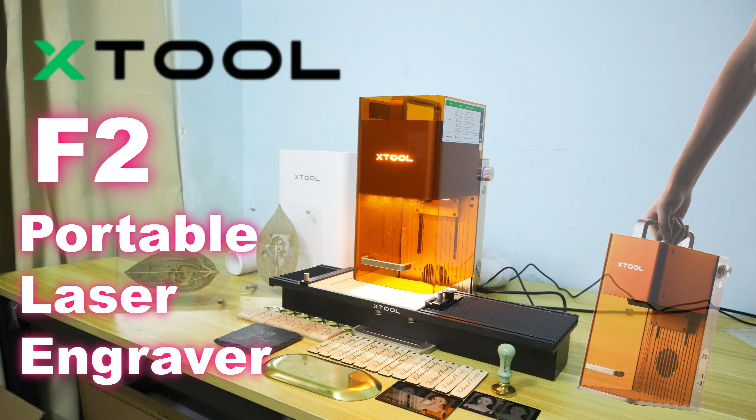Today I will introduce you to the xTool F2 portable laser engraver. You may remember the xTool F1 which they launched 3 years ago. The xTool F2 has been upgraded in many ways while maintaining the same dimensions as the xTool F1 product.

For example, the xTool F2 features a more powerful dual laser system: a 15 watts diode laser and a 5 watts IR laser, making it more powerful and efficient.

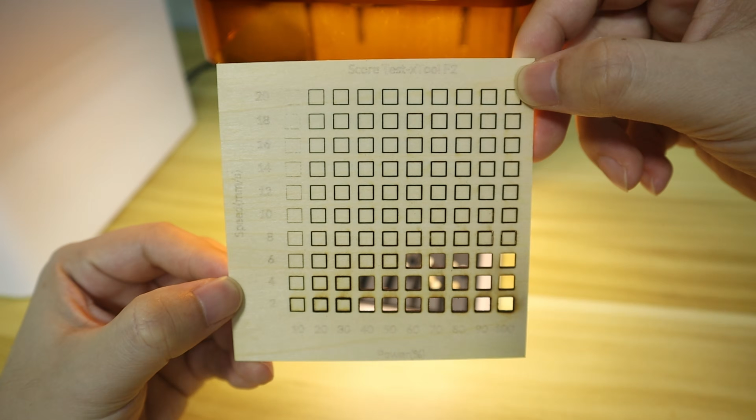In addition, a true 6000 mm per second engraving speed makes the xTool F2 the fastest portable laser engraver.

During testing, I was impressed by its brilliant automated workflow. The xTool F2 is a portable laser engraver that delivers greater power, faster engraving speeds, and a smarter workflow.

It's a truly business-ready portable laser engraver, not just a hobbyist demo unit. With its compact size, it is ideal for running on-site rapid customization service outdoors, and it fits easily in a studio thanks to its minimum footprint.

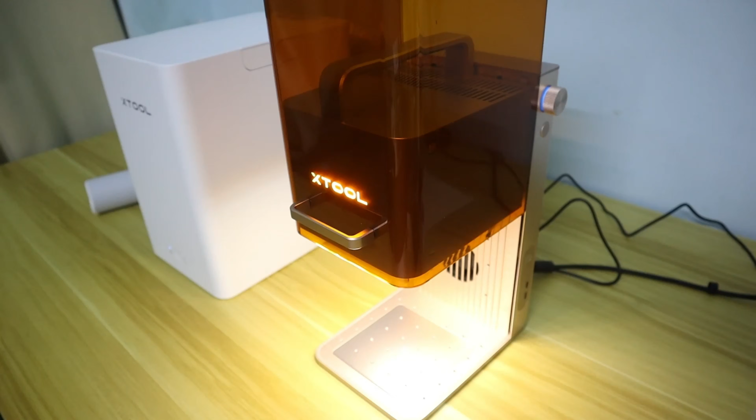Next, I will introduce you to the unparalleled smart workflow of the xTool F2.

This is why it's not just a hobby level machine, and its super easy to use features make it ideal for quick customization or small batch production in small business.

The smart workflow of the xTool F2 relies heavily on the powerful and easy to use xTool Studio software, with its excellent algorithm and user-friendly interface.

Pre-processing for laser engraving with the xTool F2 is significantly more efficient. Take this example of laser engraving on a rock.

No need to worry in xTool Studio if I want to personalize an object but lack an attractive design. In that case, I can click the template icon on the left to instantly view hundreds of excellent designs from the xTool community.

Shared by other creators, so I can browse or search for designs I like, then directly import them into the xTool Studio workspace.

Click the camera icon so that I can draw the image directly to the center of the rock with the help of the 50MP HD camera.

Then click the autofocus icon to finish the laser focus setting automatically. The engraving parameters are also super easy to set up.

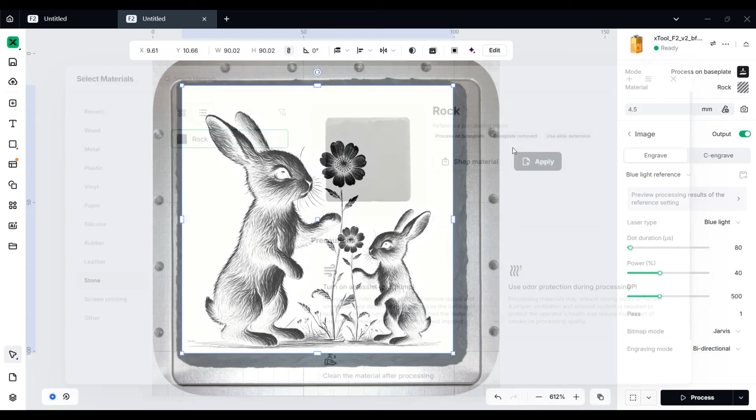I no longer need to test the optimal laser engraving parameters for each material before the laser engraving. All I have to do is select the correct material name in the material field.

As you can see, once I select the material of rock, xTool Studio automatically sets the optimal laser engraving parameters for me.

The finished engraving has excellent fine details. I was really impressed by the high definition engraving quality of the xTool F2. With the 50MP camera, engraving positioning is what you see is what you get.

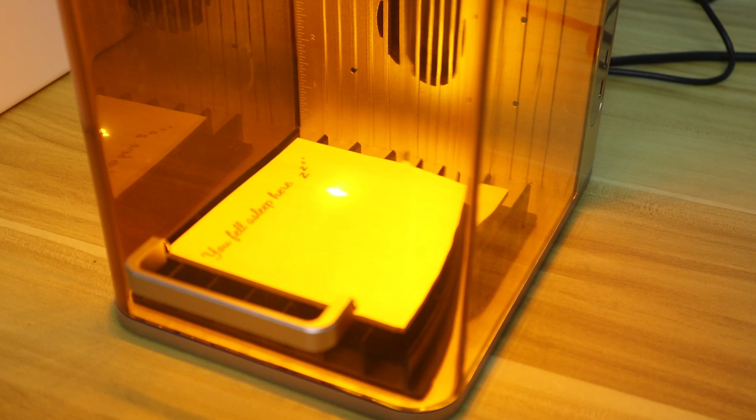Compared to other low-power portable laser engravers, the xTool F2's 15 watts diode laser and 5 watts IR laser can engrave or cut various materials more efficiently.

For example, its 115mm by 115mm working area can cut or engrave 4 bookmarks at once, with a total processing time of approximately 3 minutes and 30 seconds.

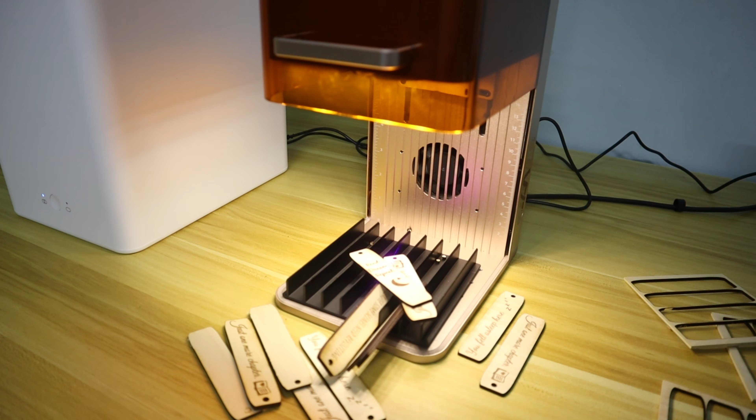Producing this batch of 12 private bookmarks took about 15 minutes total. This rapid production efficiency truly enables the launch of small businesses for on-site customization.

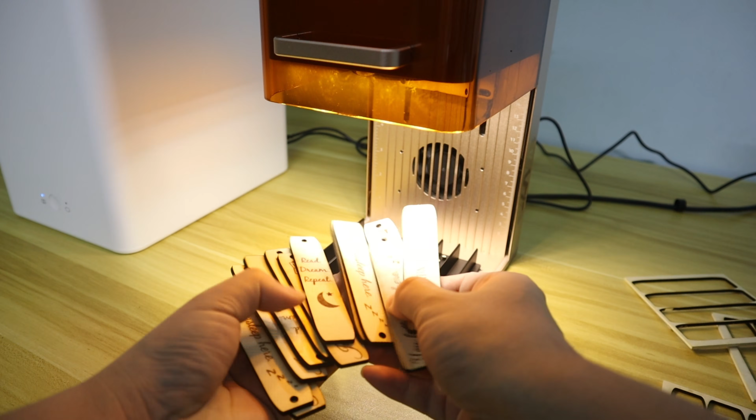However, if you do need to handle small batch production, pairing it with a slide attachment for large area batch processing would be better. Later in the video, I will introduce how the slide attachment enhances batch processing.

The xTool F2's 15 watts diode laser features a spot size of 0.08mm by 0.06mm, but the 5 watts IR laser offers an even finer spot size.

of 0.03mm by 0.03mm. This precision technology enables the xTool F2 to deliver high-definition engraving. Even in image engraving mode, the finished engravings remain crystal clear.

Next, I will demonstrate the slight difference in image engraving between the 15 watts diode laser and the 5 watts IR laser. Black acrylic is a material that both the IR laser and diode laser can engrave.

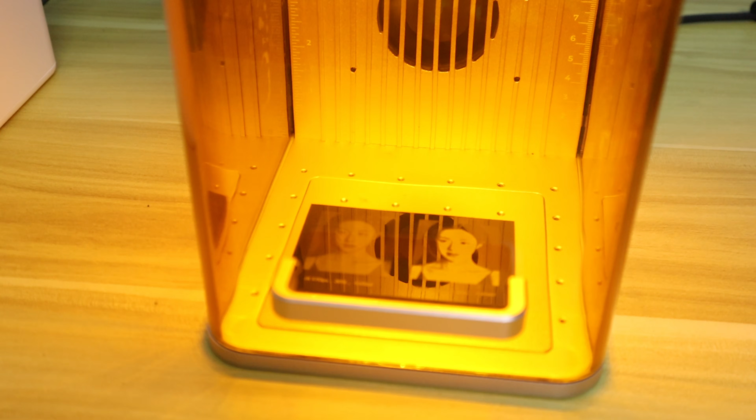Therefore, I conducted high-definition image engraving tests on it using both a diode laser and an IR laser. As you can see, the image on the left, engraved with the IR laser, is more perfect, high definition, and rich in fine details.

The image on the right, engraved with the diode laser, appears slightly overburned, possibly due to improper parameter settings.

Judging by the spot size of the two lasers, the IR laser has a finer spot size and so theoretically achieves more precise engraving than the diode laser.

Anyway, the xTool F2 portable laser engraver features dual laser sources, effectively compensating for the respective shortcomings of each laser type.

If you are looking to engrave custom designs on a leaf, the xTool F2 portable laser engraver is also truly the perfect choice. As mentioned before, the xTool F2 offers an exceptionally convenient workflow.

Simply select the leaf material in xTool Studio, and the optimal engraving parameters are automatically set instantly. Since the IR laser cannot engrave leaves, xTool Studio automatically selected the diode laser.

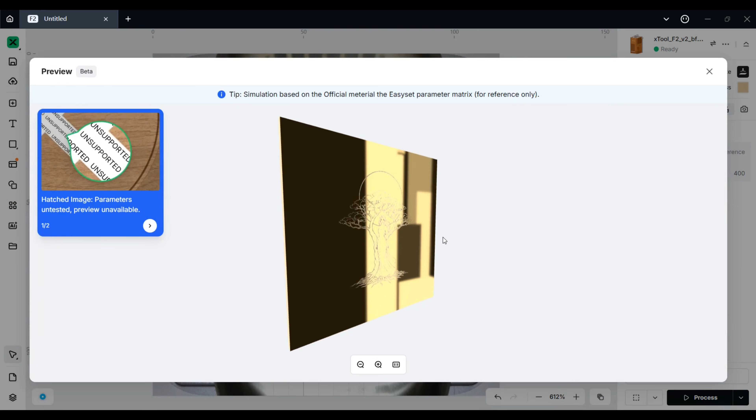In this example, I selected the fine line art style and entered a prompt to generate an AI-created image. Once satisfied with the AI-generated artwork, simply click Import to Canvas to bring the image into xTool Studio's canvas for laser engraving. The entire process is incredibly convenient.

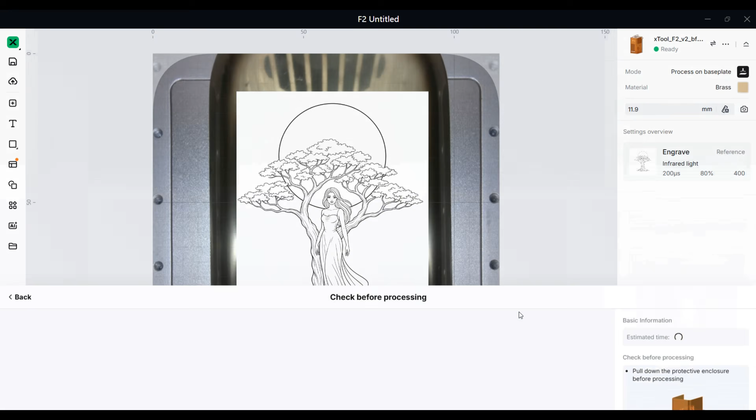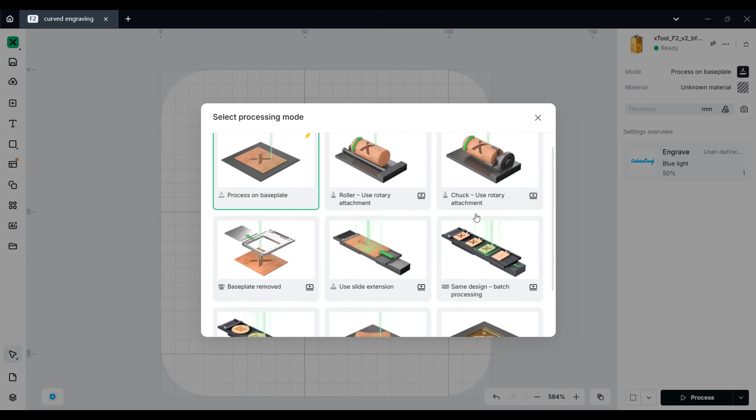Another awesome feature of the xTool F2 is its curved surface engraving. Thanks to its 50 megapixel camera, the xTool F2 is able to collect curved surface data more accurately and produce more precise 3D models of curved surfaces.

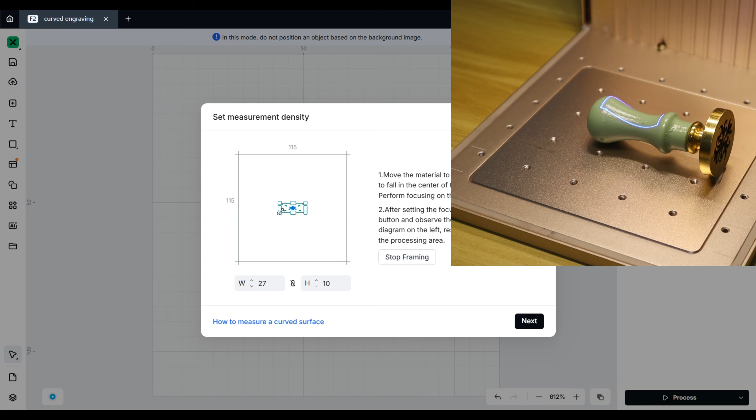The curved surface engraving process goes like this: after marking the engraving area on the curved surface, the next step is collecting surface data. The xTool F2's focused light spots then scan the engraving zone while the camera captures images, and xTool Studio generates an accurate 3D model of the curved surface.

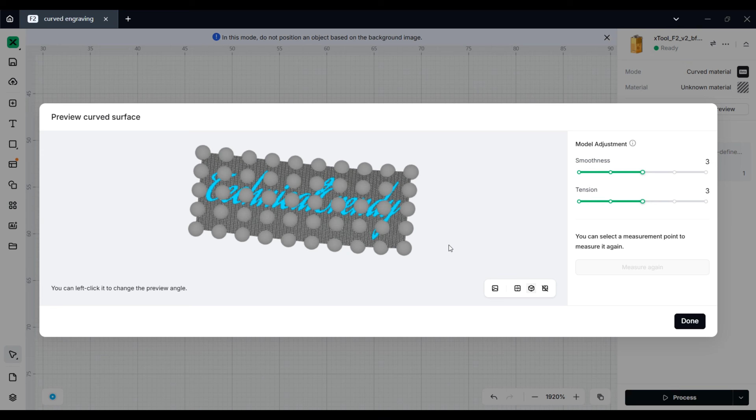As you can see, the 3D model of the engraving area is generated with remarkable precision. It's worth noting that the accuracy of the 3D model depends on the number of detection points you set for the engraving area. In this example, I set a 10x5 detection matrix.

Once an accurate 3D surface model is generated, it effectively instructs the xTool F2 to perform dynamic focusing during engraving. This means the xTool F2 automatically adjusts the laser's focal length based on the surface height, ensuring every part of the surface receives effective laser engraving.

As you can see, the text is perfectly engraved onto the curved surface, which is impossible with other ordinary laser engravers.

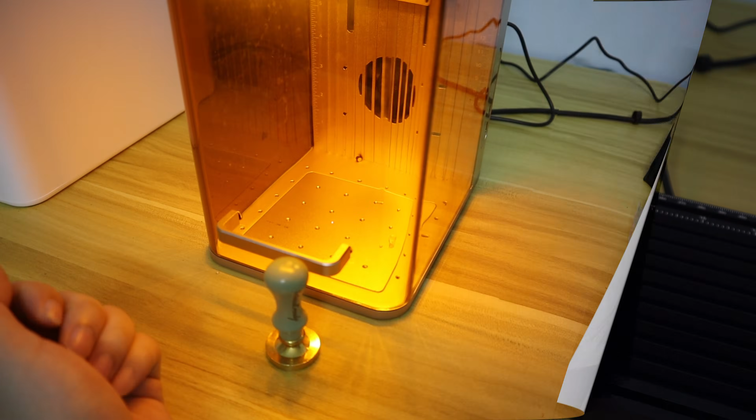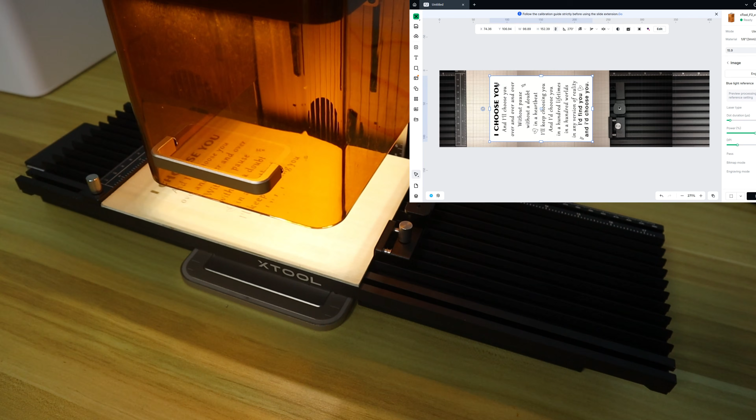The slide extension expands the xTool F2's standard laser engraving area to 115mm by 400mm. Due to its 50 megapixel camera, the xTool F2 maintains precise engraving positioning through camera vision, even when using the slide extension. The slide extension can also switch to small batch processing mode, which is highly beneficial for small businesses.

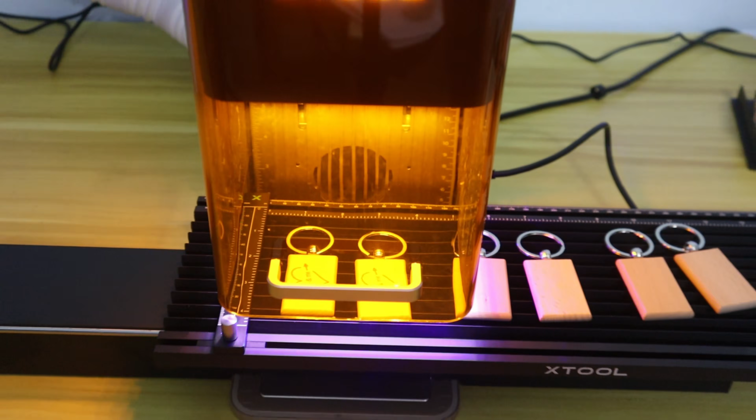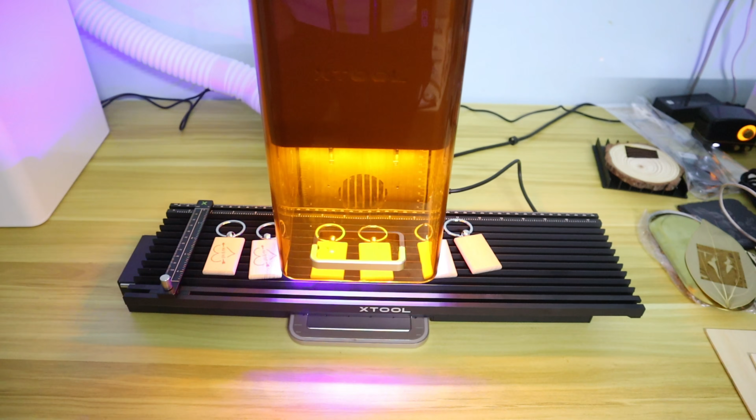After switching to small batch mode in xTool Studio, the xTool F2 automatically identifies objects with identical shapes, fills patterns onto objects, and then executes engraving or cutting automatically. Throughout the entire batch processing, you won't need to do engraving positioning repeatedly. The only action required is to continuously place identical objects onto the slide extension.

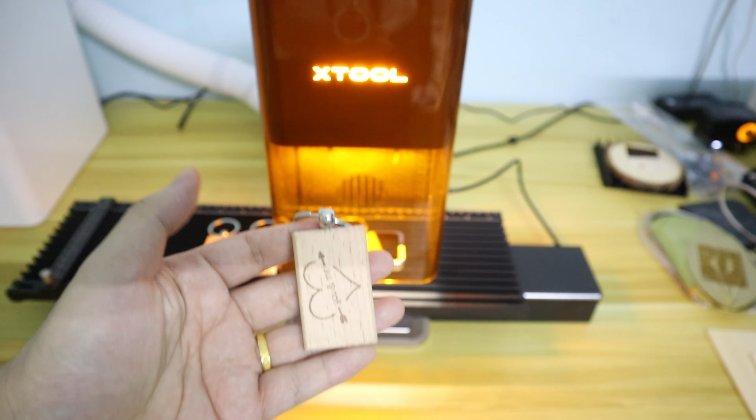Once the xTool F2 camera detects no objects on the slide extension, it will prompt in xTool Studio whether to continue batch processing or end the task. This streamlined batch processing workflow is truly a game changer for small business production.

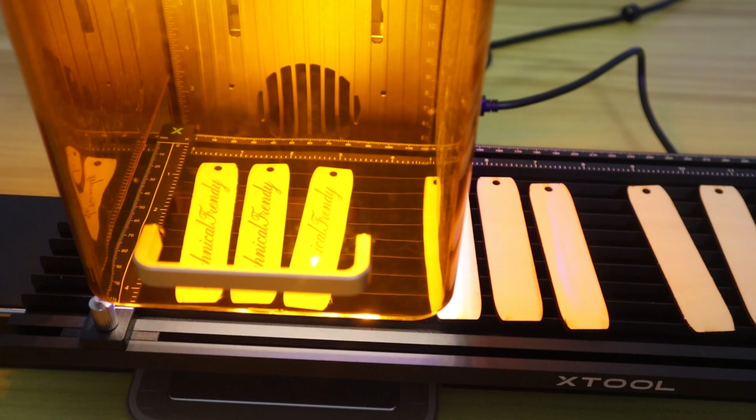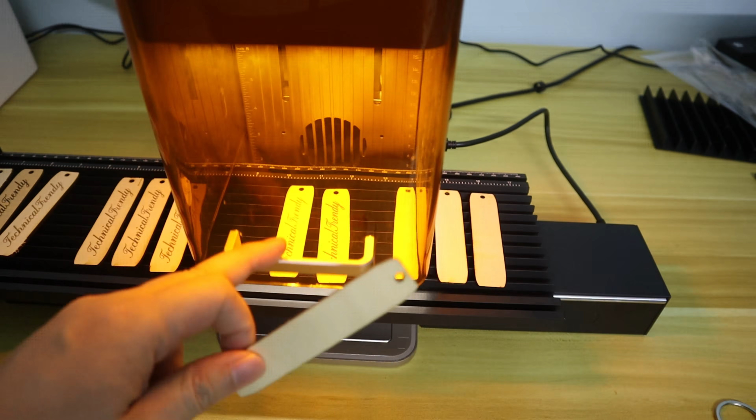As a conclusion, the xTool F2 portable laser engraver is not just a niche hobbyist laser engraving tool. If you are planning to launch a small business, the xTool F2 is worth considering. On the one hand, it shows an excellent balance between price and laser power.

Its 15W diode laser and 5W IR laser ensure its cutting and engraving capabilities are far from weak. At the same time, it offers a more affordable price compared to higher power dual laser engravers.

On the other hand, the xTool F2's unmatched smart workflow is crucial for small business production. It significantly reduces pre-processing and boosts your productivity.

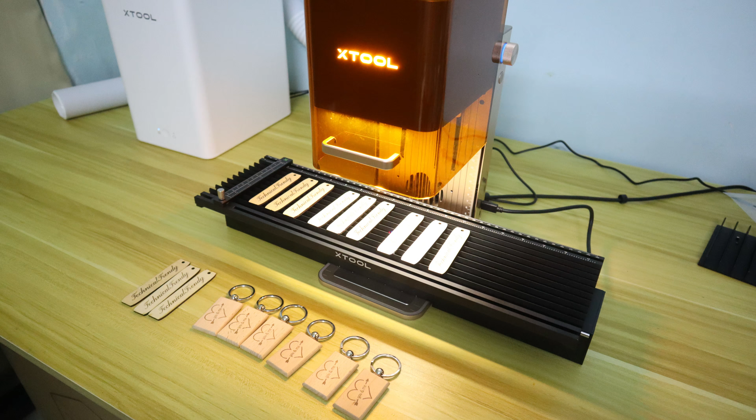Furthermore, its 6000mm per second engraving speed is currently the fastest among portable laser engravers. Combined with its portability, you can easily take it on the go to satisfy on-site personalized needs.